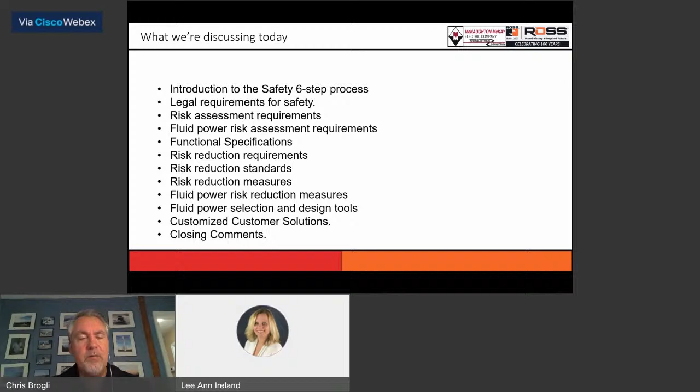So with that said, this is the Ross six-step safety development process that is highlighted in our machine safety guidebook. And step one is the risk assessment. And as you guys may well know, with risk assessment, we're supposed to develop a risk assessment plan before we start. We're supposed to assess all attributes of the machine, including fluid power. We're supposed to look at all modes of operation as we're doing that assessment in order to determine the required system performance.

Once we have done the risk assessment, we then need to determine how we are going to reduce risk for each of the hazards that were identified. And so we do this by looking at the different job tasks and types of job tasks there are, and what the functionality needs are for each of those job tasks for each mode of operation of the machine. Then we're going to determine what our best mitigation techniques are, and then determine the required safety functions.

These will lead us right into selection of mitigation or risk reduction devices, and then ultimately will drive our design. And whatever's identified in the functional spec is what we're going to validate in the installation and validation process to prove that the system operates as we functionally specified.

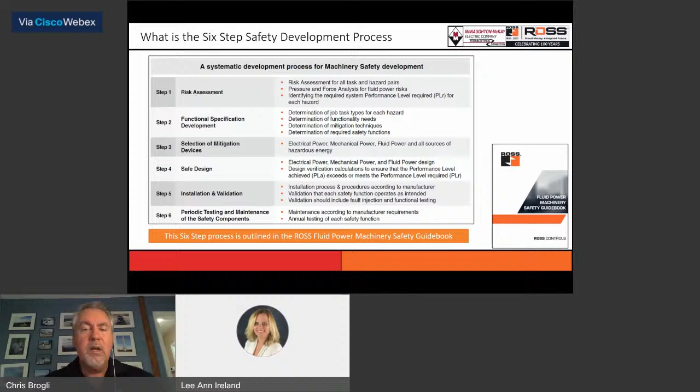And then once we have done that, put the system into use, the standards require that we do periodic maintenance and testing. And so we're going to touch on each of those steps through the next 30 to 40 minutes. And so with that said, we will be referring to the Fluid Power Machinery Safety Guidebook that's on the right-hand side of the page there as we go through this process.

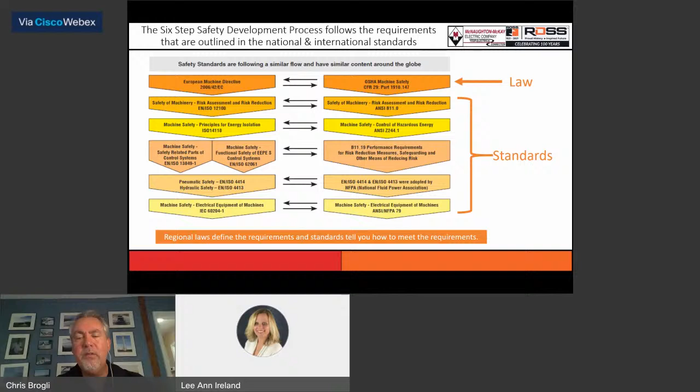And then when we get into electrical safety, this gets more into design of the electrical circuitry inside, wire colors, stuff like that. But it also identifies stop categories. That's in NFPA 79 and its European equivalent, IEC 60204. So just keep in mind, laws at the top, OSHA and the Machinery Directive, just define the requirements. They don't tell you how to do anything. That's what the standards are for. And this is not going to be a big standards lecture. This is probably the only slide you're going to see on standards. The rest of it is going to be more application. How do we do it?

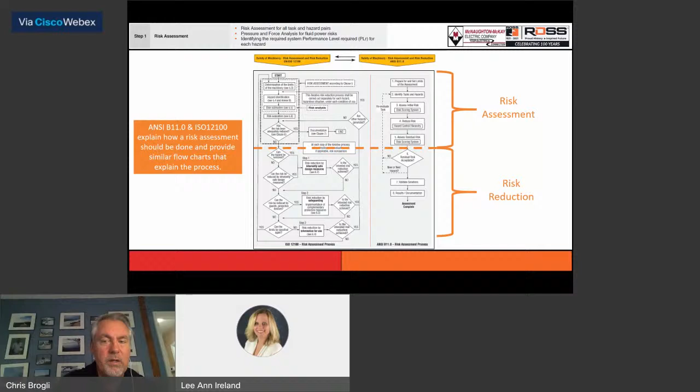And so if we look at ISO 12100 and ANSI B11.0, both of them deal with risk assessment and risk reduction. The top part of the flow chart shown here is risk assessment. Those two standards really outline the requirements for risk assessment, how you prepare for it, how you document it, what you do with it. And then the bottom half of those two standards deal with risk reduction. So we're going to jump right into step one in the 6-step process, which is risk assessment.

And so most people, if they're doing just automatic and normal operations, are ignoring the biggest part of the potential injuries. So we need to look at all those other modes like maintenance mode, setup mode, changeover, what we might call threading of the machine, feeding materials into the machine, even quality interactions where they're taking measurements on something that's in process. And so we need to look at all modes.

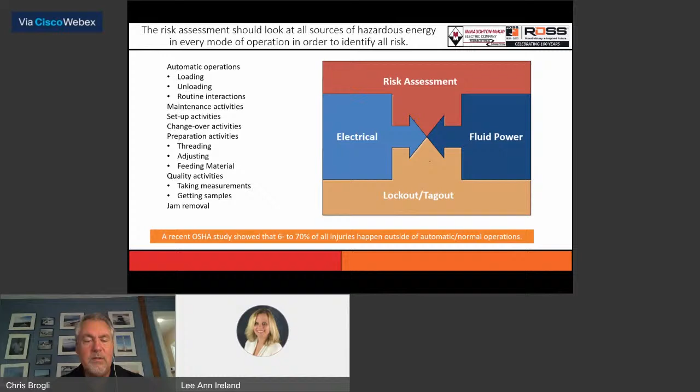And then in our assessment, we need to look at things like electrical, but also pneumatic. And as part of our risk assessment, we also need to identify what could be addressed with lockout tagout, because maintenance activities should be done with lockout tagout. So we need to look at this holistically for all modes of operation. And this holistic approach has changed how many of the best-in-class companies are assessing and addressing risk.

So many of the consultants that I'm working with and multinational companies have gone in and implemented a 3-step assessment process. Step one is identifying the task type. So what is maintenance, which would be treated with energy isolation or lockout? And the reason people do that is, why would you need to do a performance level calculation if it's going to be treated with lockout? So that's something you can separate as your maintenance activities.

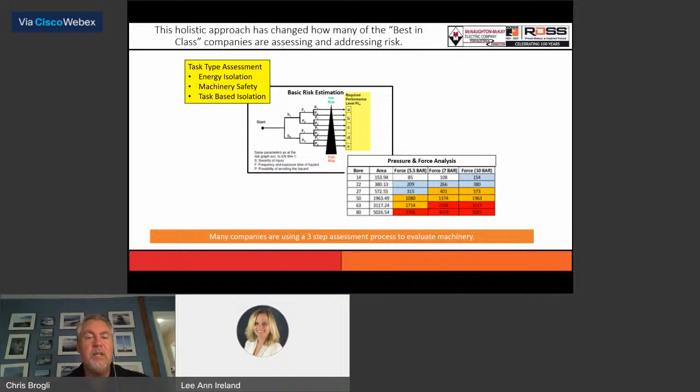So a lot of companies are starting to use a 3-step assessment process, like I'm showing here, to evaluate the machine holistically. So with that, I'm going to take a look at this and understand why companies are starting to look at fluid power. There's a statement here from ISO 13849, and there's a similar statement in ANSI that says pneumatics and hydraulics are part of the safety related part of the control system. That means they need to be considered. It also says that it requires products that are proven in use or well tried.

Well, the way Ross proves that our product is well tried and meets safety requirements is we do a third-party certification. Most reputable safety companies are doing third-party certification. So you may hear terms like TUV. I know Rockwell, who is also one of McNaughton-McKay's main product lines, uses TUV certification to prove their compliance. We use DGUV, which is just another certification body, to prove that. So a lot of regions of the world will not allow non-third party certified product. That's why we do certifications.

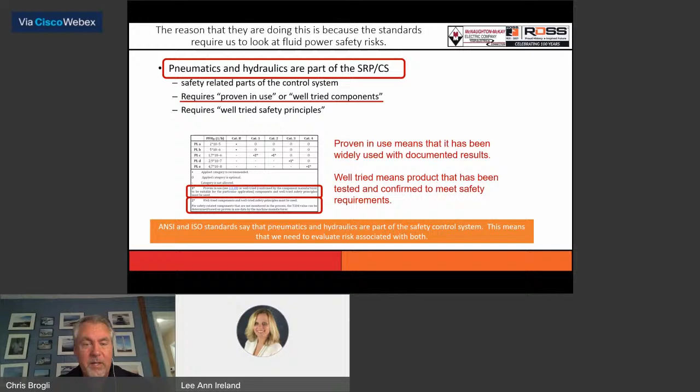And so now that we understand that pneumatics and hydraulics have to be considered, we have to think about assessing it. And that's where we need to understand the pneumatic and hydraulic safety standards. And here's a scary thing. If you look, ISO 4414 for pneumatics was published in 2010. It's been around for 10, 11 years. Most people don't know about it. There's also a hydraulic safety standard that was published in 2011. It's been out for 10 years. Most people don't know it.